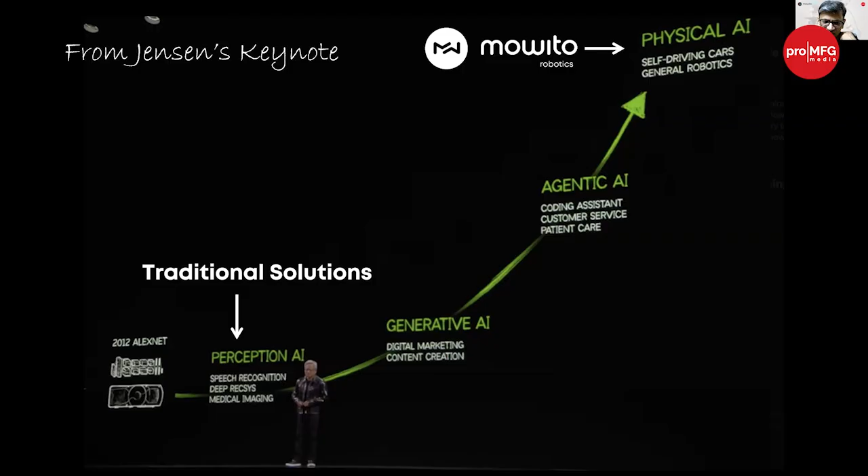If you look at how automation has been in the industry so far, traditional automation typically has a system integrator who starts with a standard set of components like a robotic arm, camera, and gripper, then adds vision AI software, usually from a Cognex or a Keyence. They are the big daddies of the vision world. But lastly, he writes custom software for a particular task, and this is what the integrator will do and deploy the whole system.

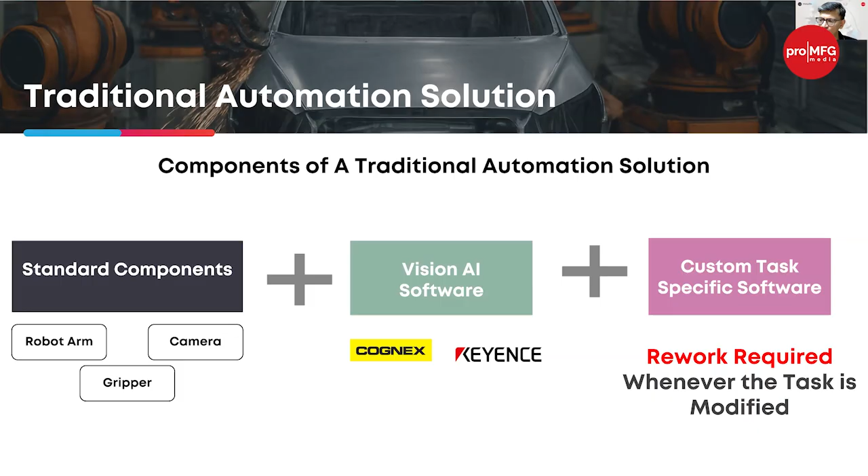Now, the challenge is whenever there is a change in the part design or whenever there's a change in the environment, this custom software has to be redone, it has to be rewritten. Then you call the integrator back, he has to do his modification. Sometimes it involves redoing some jigs and fixtures. All of that takes time and effort and money. And this happens every time you introduce anything new in the line or anything changes in the line.

What are we trying to do? We are trying to walk away from that paradigm completely, remove all the Vision AI software and custom task-specific software, and replace it with one AI model which controls the robotic arm. This AI model is capable of handling most of the standard tasks, including inspection, assembly, and soon wire harnessing as well in the assembly line. These are the tasks we focus on, and we want the AI model to be capable of handling these tasks without the need for jigs, fixtures, and other paraphernalia around it. Let me just show you a quick video.

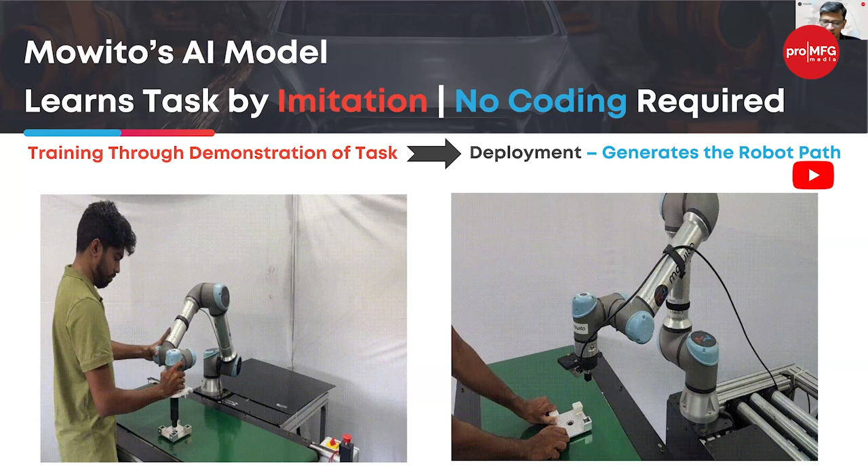If you can see the video playing on the screen, what you're seeing on the left is an operator demonstrating the task to the robot. As he demonstrates the task, we are collecting all the values from the vision, joint sensors, torque sensors, all of it, and we are fine-tuning our model. The AI model is already there, it's being fine-tuned using these demonstrations. Once the demonstrations are done, you can see that even if the part is being moved, the robot is able to accomplish the task successfully. So it's now completely autonomous in nature.

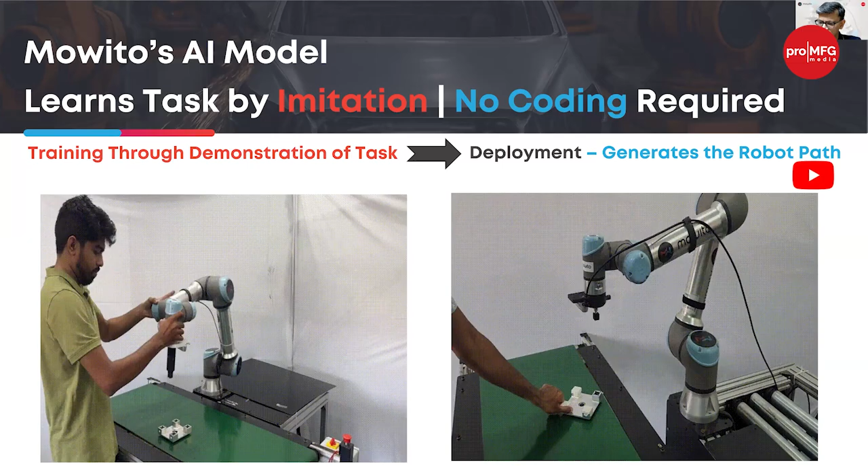Of course, there's a camera on the arm which you may not be able to see. We are using a camera, so all of the data from the camera, from the torque sensors, from everything is being used to fine-tune the model and to help the robot understand what it means to complete the task successfully. After which it becomes totally autonomous.

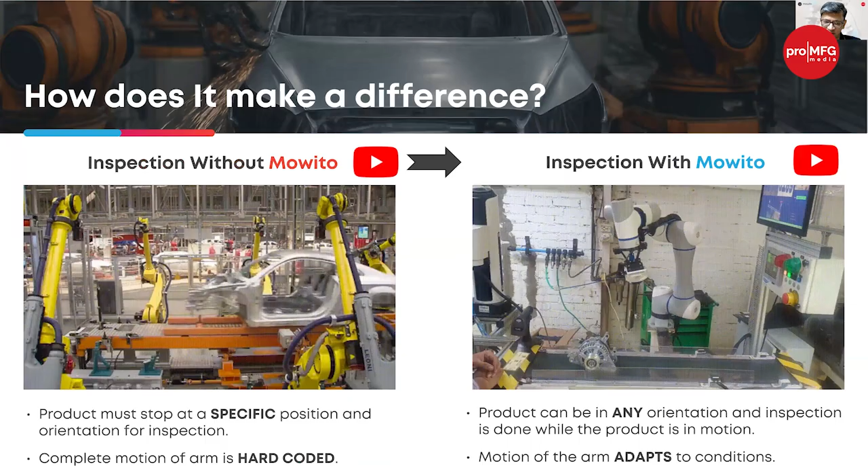Now, how does it play out on the line? Just to give you a live example, on the left you see a traditional inspection line for a car chassis. So the chassis comes, it has to be in that particular location. The robots are hardwired, hard-programmed to go to particular locations and take images. If there is any change in the position of the car, the robots wouldn't be aware of that. They just take the images they always take, and the images may not be useful at all. But the robots still don't know where the car chassis is. They are all working in silos, all independent of each other.

But what you see on the right side is what we have implemented at Denso, one of the largest manufacturers of alternators. They have a line to inspect alternators, and they have 8 or 9 different variants of this alternator, not just one. They wanted a fixtureless line for this inspection, because the moment you add fixtures, you cannot work with different variants on the same line. It becomes a constraint.

So to remove the constraint, they wanted a fixtureless line, and on top of it, upstream, this alternator is being placed by a human operator on the line, which means there can always be a change in position or orientation. They wanted a system that could accommodate all of this, and we have delivered a system with a cobot with 2 cameras on it. It automatically tracks the part, aligns to it, and captures images for inspection without stopping the conveyor. What they were earlier attempting with 6 or 7 different static cameras, we have replaced with one system operating on the fly, delivering the result they needed. No jigs, no fixtures, no stopping the conveyor, improved throughput, all in one go.

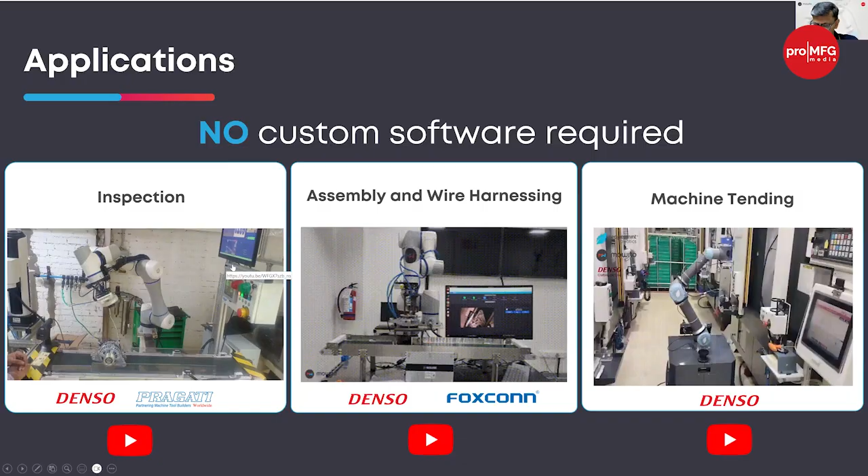What I'll do now is switch over to some videos of these particular use cases, and feel free to stop me if you have any questions in between. Let me just share a few videos. And if any of the panelists has any query, you can please feel free to ask.

I have one query. Okay, in AI vision camera, up to what accuracy can we capture?

So it depends on the use case, and it depends on the camera itself. We don't use Cognex or Keyence cameras. We decide on the camera, either Basler, FLIR, or IDS. Now, which particular lens we use and which camera and resolution is decided based on the size of the defect you want to capture.

This is on ceramic parts for a company called Indo-MIM. It goes into an oxygen sensor for Bosch. Those kind of use cases can be done with vision cameras, no doubt about it.

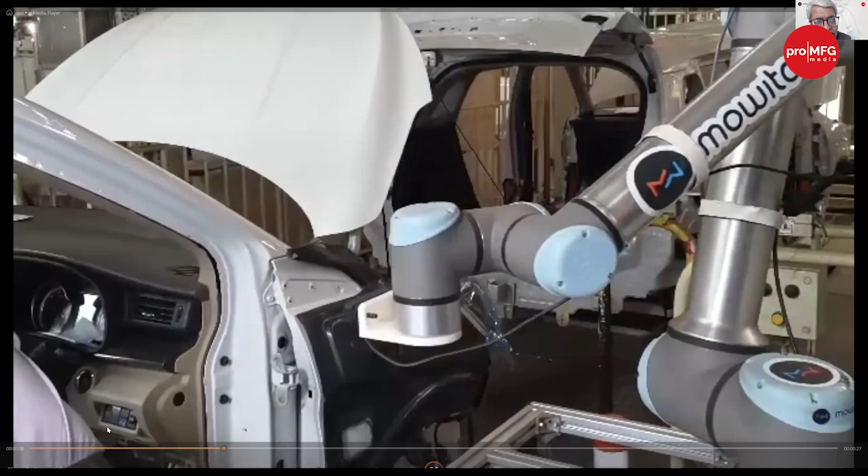So this is for the cobot-based feature inspection for end-of-line inspection for a car chassis at MSI, where they wanted to tally the features with the variant because it's a multi-variant line. So different variants come on the same line. And obviously they cannot stop the line to inspect.

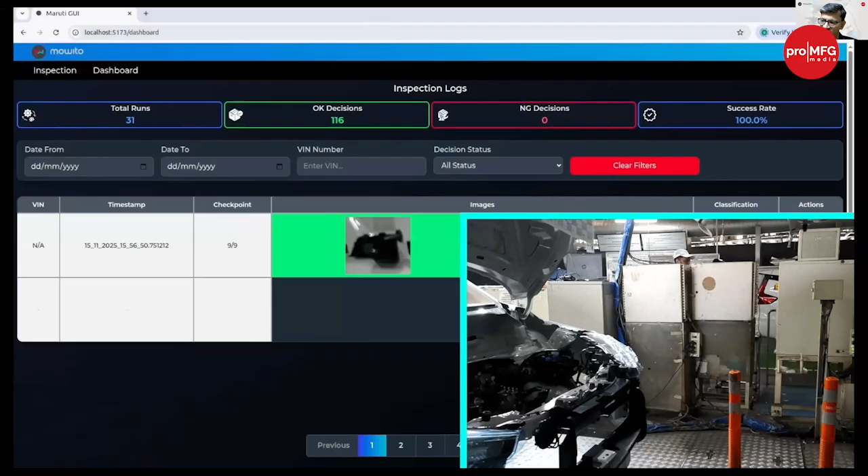Today what's happening is the operator holds a tab in his hand. He has to bend inside the chassis, look at the various features, and fill checkboxes on the tab. But it's very hard to do this for 8 hours a day when you have to bend, look, and move across the line.

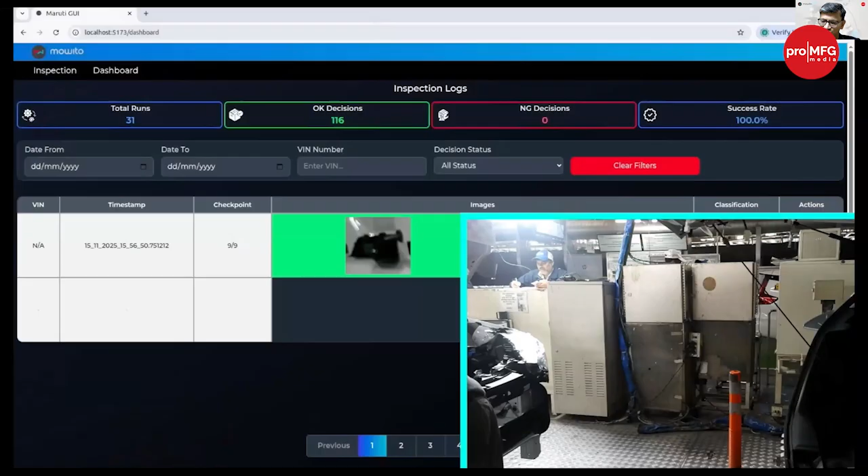So with this solution, the cobot automatically tracks every chassis that comes on the line, aligns to capture different images from different focal points, and then analyzes the images at runtime to say this feature is part of this variant or it's not there as part of this variant, which is wrong, and then flags that. So that's something we have implemented, again without stopping the line.

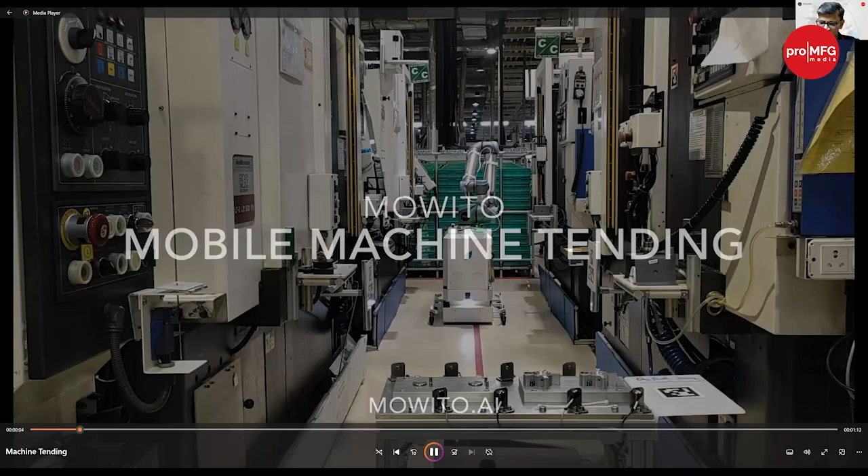This is a use case for machine tending, which we have deployed at Denso. This is AMR based machine tending, handling 4 machines in one line. It has to pick the part, place it into the machine, take the part from one machine, and place it into another. Of course, the cycle time was sufficient enough to do this task.

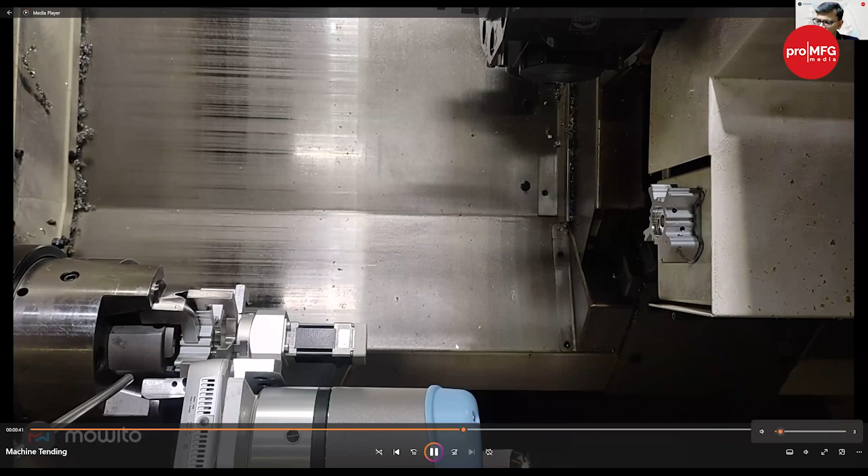But the real challenge here is the AMR vendor, Peppermint, which is again Pune based. The real challenge was we had to accommodate for the inaccuracies of the AMR because the AMR will stop with 10 or 15 millimeter inaccuracy, but I have to place the part with 200 micron accuracy in the chuck. So to enable that, we're using a mix of vision and force feedback.

Let me go back a little. I'll slow down the video so you can get an idea of what I'm talking about. At this point, the camera actually loses focus of the chuck. I cannot see anything that's happening, so I am completely going by force feedback to say whether the part is butting against the chuck or not. We're using the torque sensors available in the cobot, and it actually wriggles the part just like how a human would do it, so that it butts against the base of the chuck.

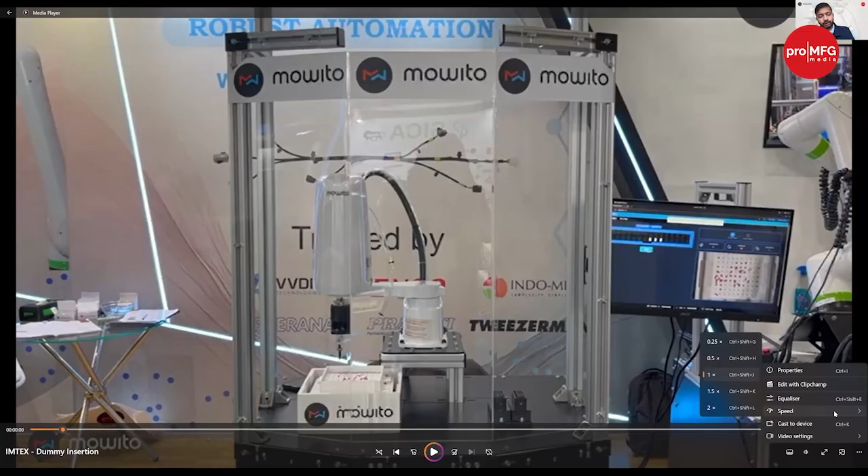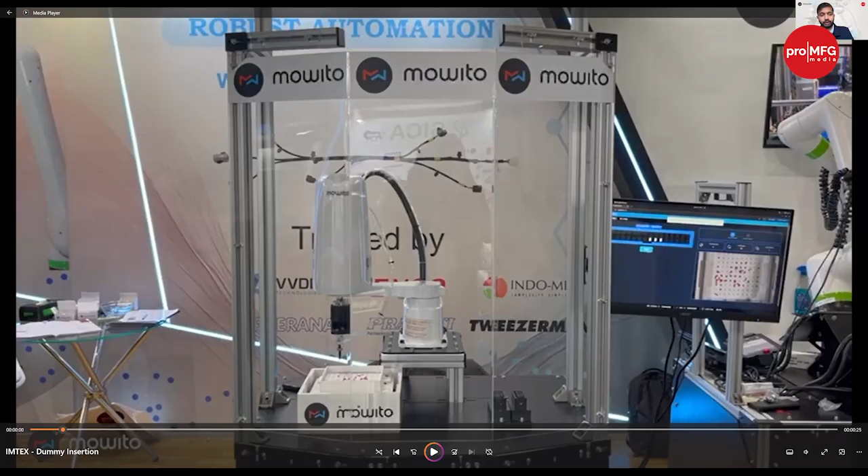Just to add to what Aditya said, in summary, in an ideal world, if everything was very accurate, a vision system would not be required. But as the AMR is a physical system, it will have inaccuracies in where it stops, 5 to 10 centimeters, even in the yaw angle. Further, when the arm extends, there will be a tilt in the position and orientation of the AMR. So when you operate it in the real world, there are a lot of inaccuracies. And as you might be aware, when you fit the object inside the chuck, the clearance is very low in most cases. In this case, it was 200 microns.

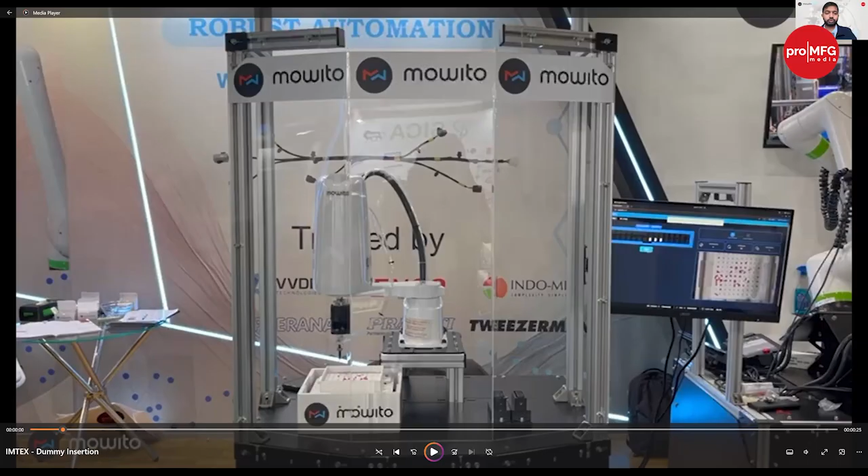And in the case of a CNC machine, there will be coolant coming out, which can affect the vision of the system. Further, in these close quarters, the vision does not get the full view. So we are not only using vision, we are also depending on tactile feedback to make sure that the loading and unloading is a success.

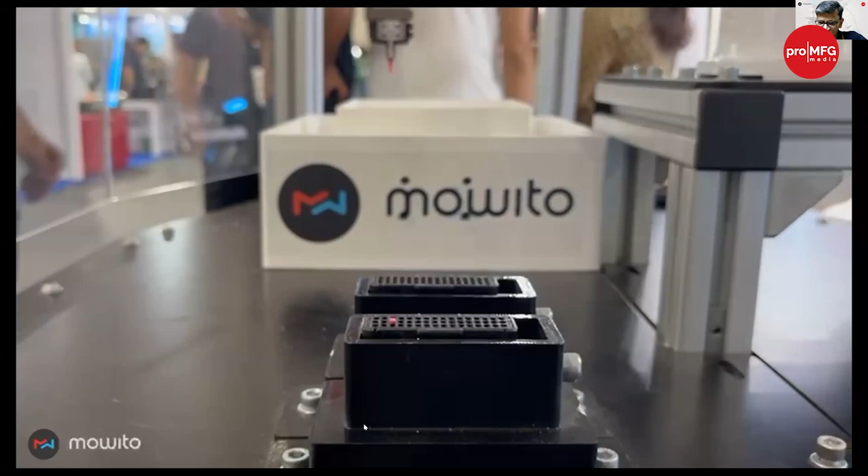So this is a small part assembly system, which I'll demonstrate right now. This is for the wire harness dummy seal insertion that we have done. But of course, it's not restricted to dummy seals alone. It can be used for any small part assembly. What you cannot see here is there's a camera above the feeder that you're seeing, and that's what is actually guiding the arm.

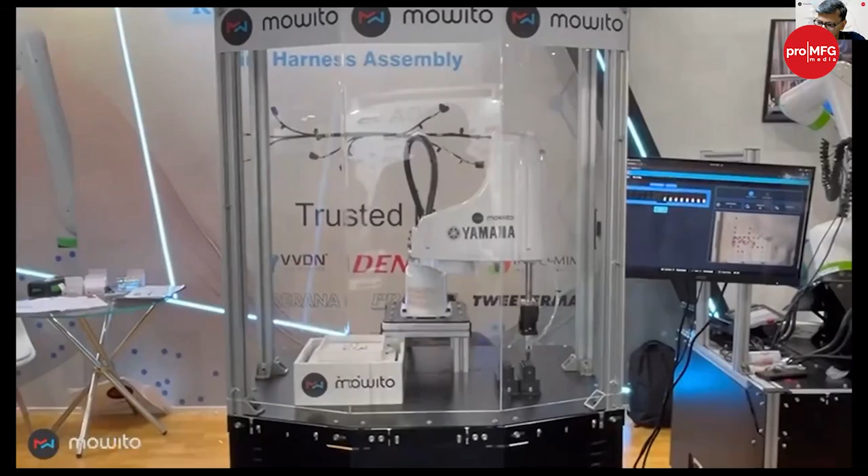So this feeder that you're seeing, the vibratory feeder, right above that there's a camera, and that's what is guiding the arm to pick from the right slot and place it in the seal. So any bunch of small parts can be used. This system can be used to assemble any small parts required in high volume. Right now we are working with another company which wants to do assembly of seals with this system, and of course from the wire harness industry we already have ready orders for this.

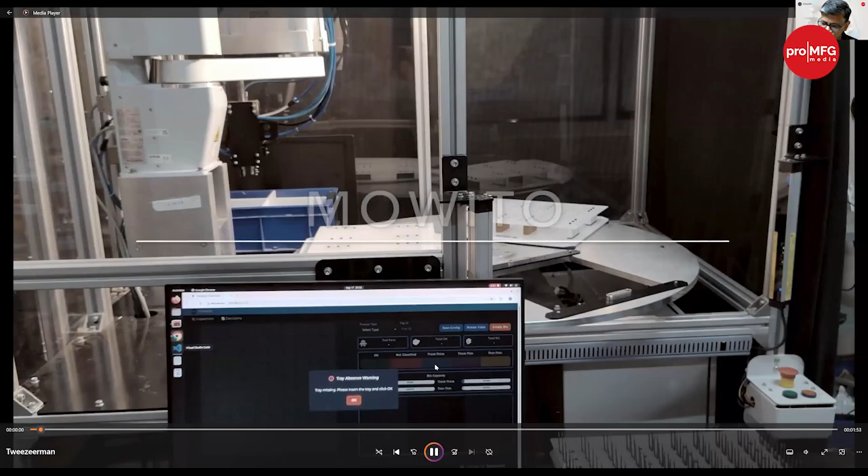And we have delivered a full inspection system to a company called Tweezerman. Tweezerman is a German company which manufactures tweezers for the beauty industry. They're based out of Pondicherry. This whole cell was a full end-to-end development that we did for them to inspect the symmetry of the tweezer lips, because the lips of the tweezer have to be symmetric. And we are looking at a 0.05 symmetry scale here for the two lips.

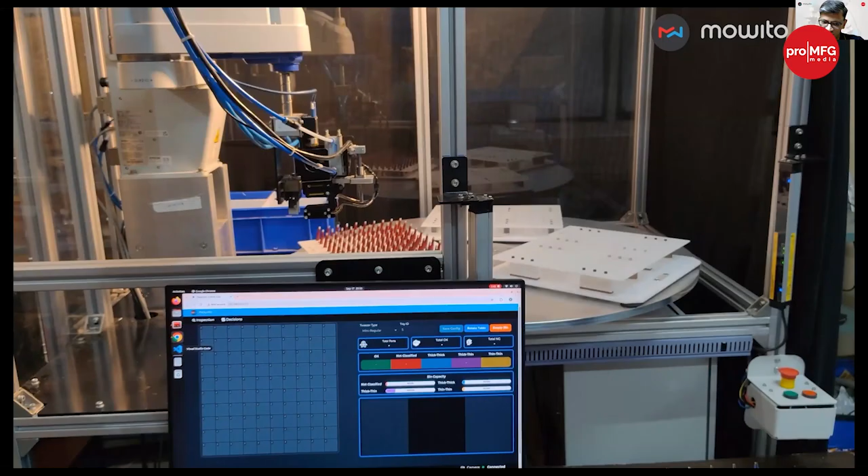So the UI that you see, like this is what I was talking about earlier, the user interface plays a huge role in how quickly the system is adopted. And the entire UI was built by us. So it does three passes: first it has to check the height, then it arrives at the right focus and checks the tweezers.

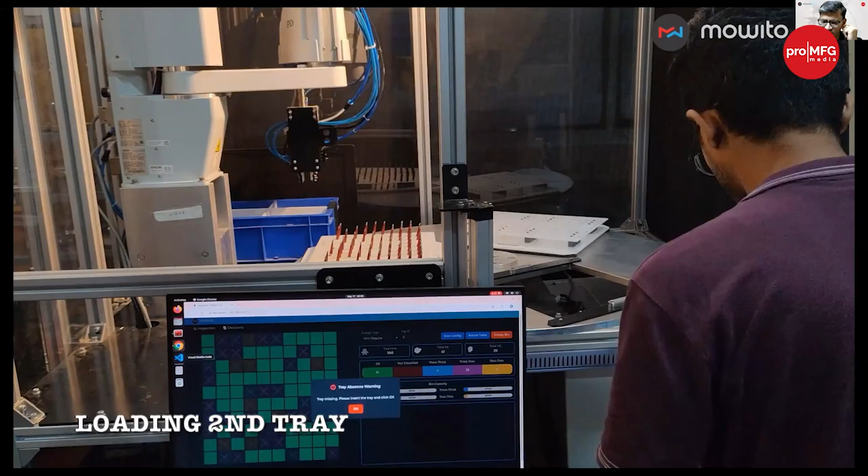At the bottom, you are seeing the two black lines, that's actually the two lips of the tweezer, and we are comparing the two lips. Again, in the UI, the green ones are good, and different colors mean different things, like both sides are thick or both sides are thin or something like that. Then we pick out the bad ones and put them in a separate bin. So this entire system was developed as a turnkey solution for them, and it's now being used in production.

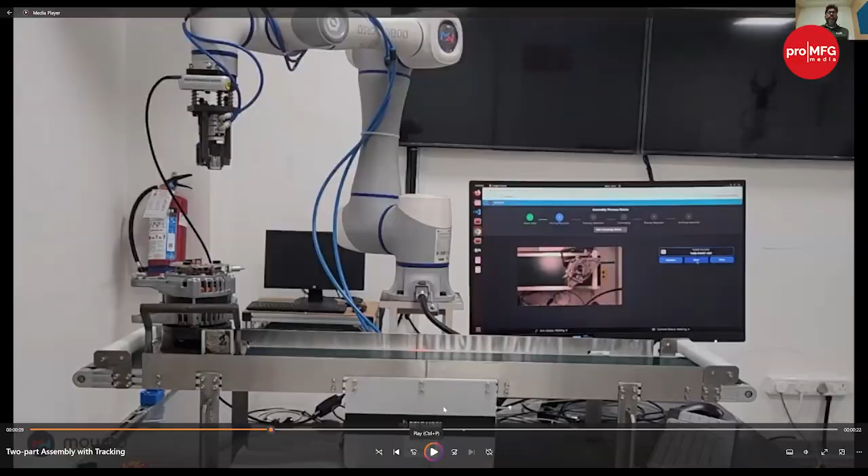Aditya, I think you're based in Pune, right? We are based out of Bangalore, but Pune we are getting a lot of inquiries, so soon we will also start something there. When you're in Pune, can you visit our plant? Sure, why not, I'll definitely visit, just for that.

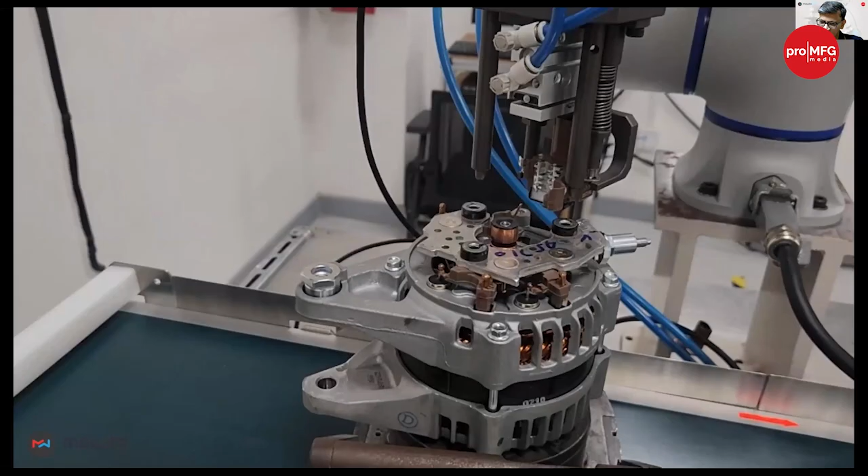I just wanted to show another video about the assembly itself, what we call two-part assembly. You saw the inspection of the alternator earlier; we are extending that whole concept of vision-guided robots to assembly. Here, as the alternator moves on the line, we are actually assembling a part on it. No feedback is coming from the conveyor, it's completely done at the vision layer, tracking the alternator, aligning the pins, and placing the part. I'll just replay the video.

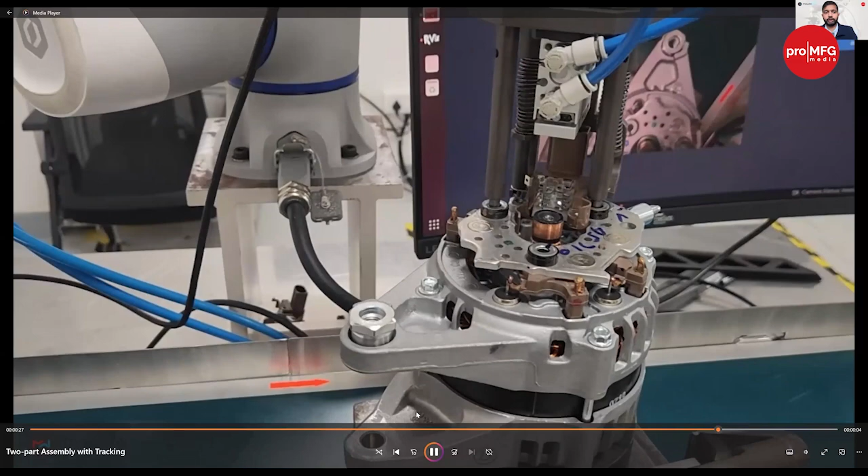The reason we are not taking feedback from the conveyor is that the integration time reduces. For example, if the line is continuously running and you do not want to stop it, you just need to put the robot arm next to the conveyor on a pedestal and it will be ready to work. This is how we did POCs at Maruti as well, because the main assembly line would not stop for us. We just put the robot arm on a pedestal next to it, and it was ready to go. The implementation is without any disruption to the operations.

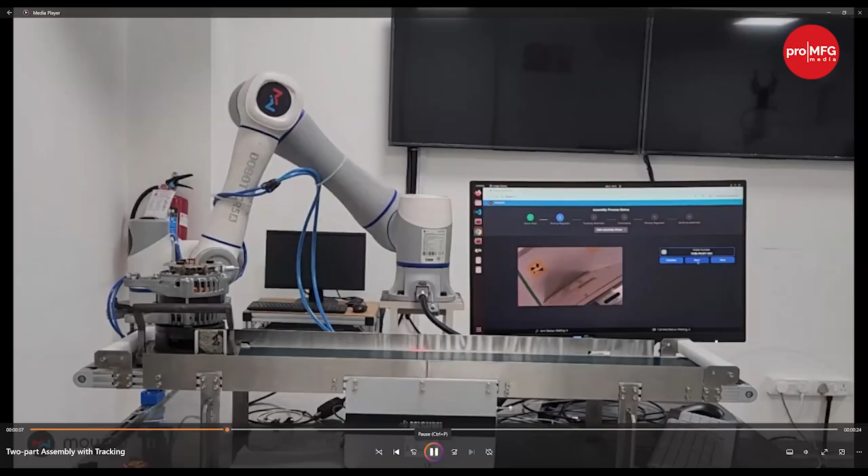It can handle a variety of takt times. The question is, can it handle a variety of cycle times? It depends on what operation the robot arm is doing. Our vision system does not take a lot of time, but for the robot arm to move from one place to another, some actual motion time happens. For example, let's say the system is designed to produce 500 parts in a shift, but my requirement today is not 500 but 200, so the line will run at lower speed. Will I have to reconfigure it, or will it adjust itself automatically to the new takt time? It will automatically adjust.

The speed we have tested so far is around 90 mm per second of the conveyor. We are not using conveyor speed as an input; anything below that speed it will automatically adjust because we are tracking the part itself, not taking conveyor speed as input. Even though conveyor speed is not an input to the system, the speed of the part is still governed by the conveyor. Up to 90 mm per second of conveyor speed, we have been able to place the part like this. So even if you stop the conveyor or reverse it, the system will automatically adjust to that.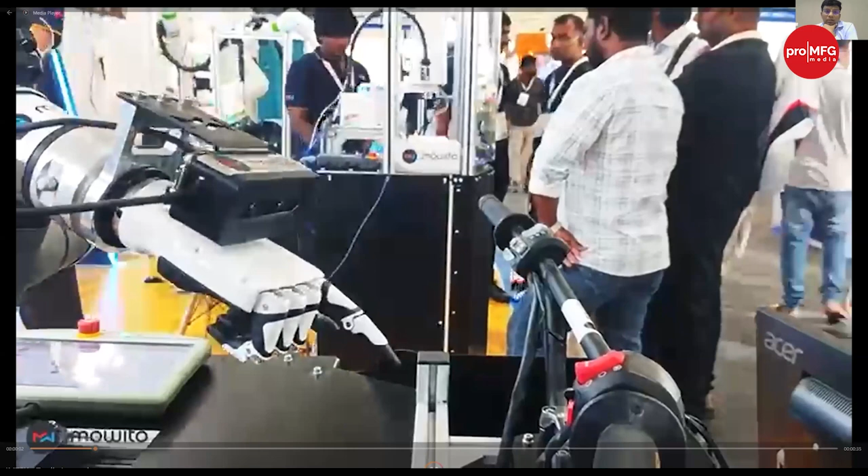Anand, any question or observation from your side? No, it is great, maybe I will contact Aditya to know further. Yeah, so this was another demonstration.

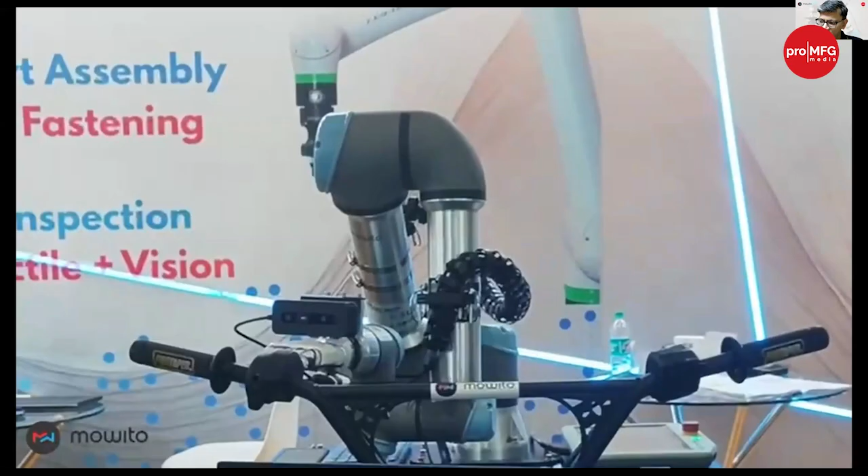We had a stall at Imtex this year in January, and this was another demonstration we had there for tactile inspection. If you look at any vehicle, we are showing it on a bike's instrument cluster, but it can apply to a car or any place where inspection can happen visually, even with cameras. But there are some cases where a human is still involved, wherever it involves a touch and feel kind of operation.

Here it's like a human would be checking every button of a vehicle on the assembly line. How would you automate it? You would use something like this, right? You would have to use a system like this.

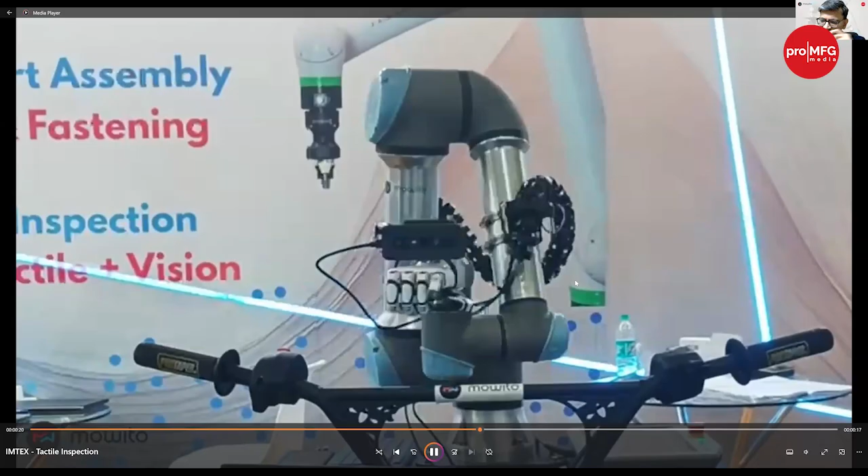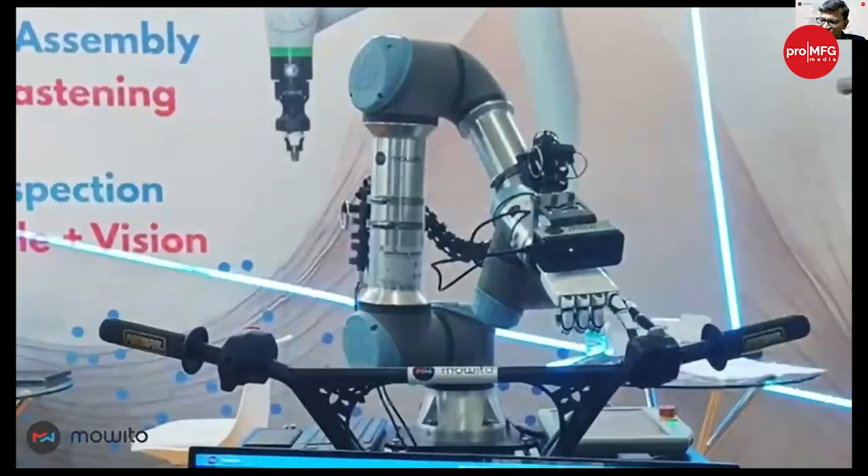That's what we are demonstrating here, where we have mapped the force signature of a button that works normally, and the moment it does not match that signature, we know it is faulty. So for every button, there's a force signature, be it a horn, a light switch, or an indicator. There is always a normal force signature.

If you see the bottom of the screen on the right side, it is showing you the particular force signature for this button. Now, if the same button is faulty in another vehicle, we know that it does not give the same force signature. That can be seen.

In some cases, the gripper can also be a simple gripper, and we can use the cobot's force sensors to achieve the same result. It depends on what axis we have to measure the force in.

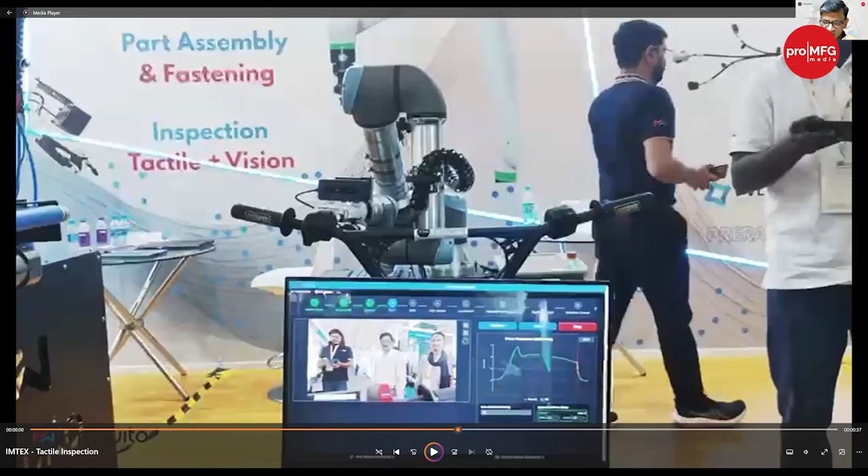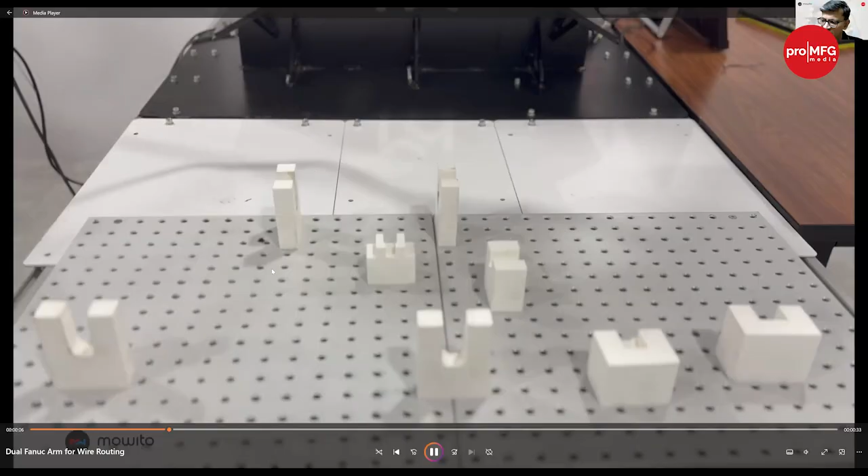We have also now started working on dual arm use cases. I'll show you a quick use case in wire harnessing that we are working on for specific customers. This is two Fanuc cobots which are able to handle a harness. Of course, wire harness has barely any automation available today. It's completely manual because current robots cannot handle flexible objects the way they are programmed.

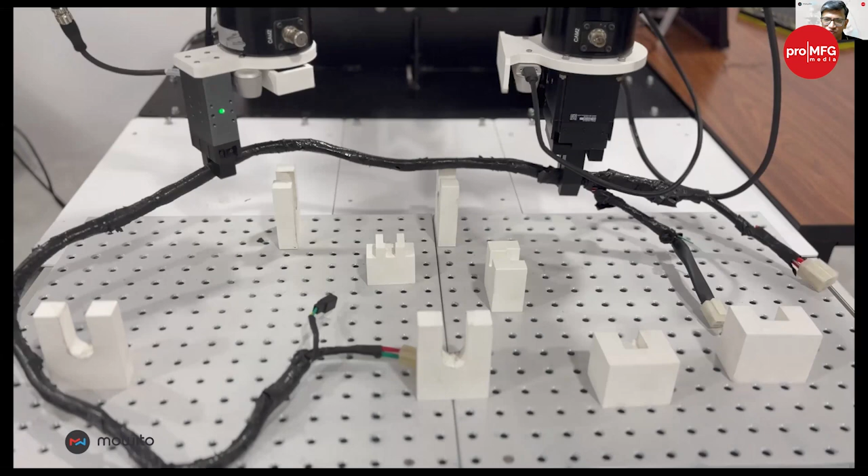This kind of application, requiring multiple cameras and multiple force sensors, has not been done before, and we demonstrated this at Imtex. It picks up a harness and lays it out the way it's usually done in the harness industry. This is step one, after which we will do the inspection, taping, cable tying, and all of that. But we have successfully figured out how to handle flexible objects like this, paving the way for the next set of operations.

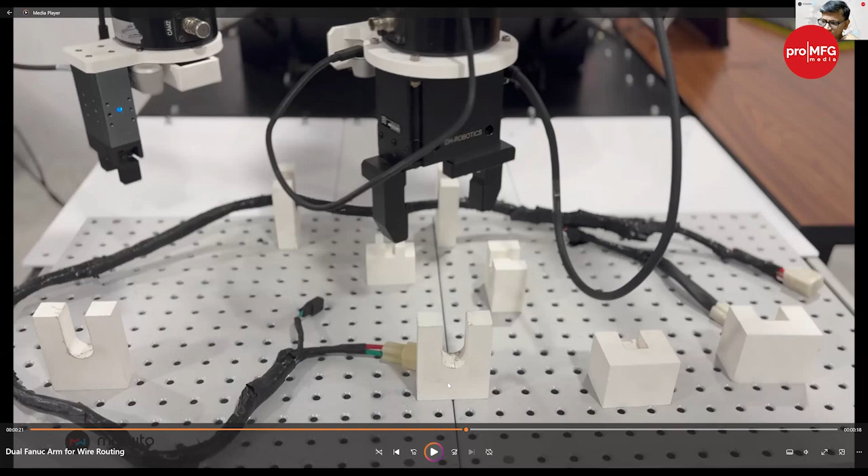In this specific application, one of the key interests of our customer is the inspection—laying down the route wire and doing the inspection. But as Aditya mentioned, this is step one. There will be more automation coming soon on this line, on this process.

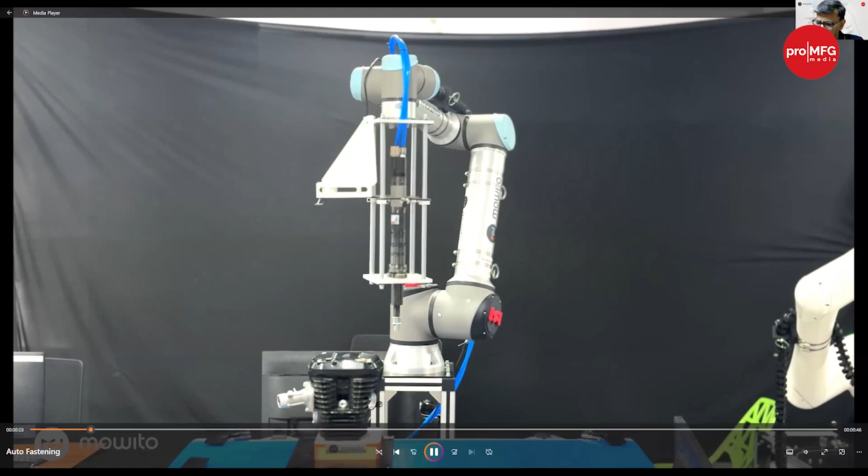One last thing I'd want to show is fastening. We are working on dynamic adaptive fastening applications. It's similar to assembly, where the robot automatically tracks a part coming on the line and uses a standard tool, like an Atlas Copco or Ingersoll tool, aligns to the fastener and tightens it, again without having to stop the conveyor.

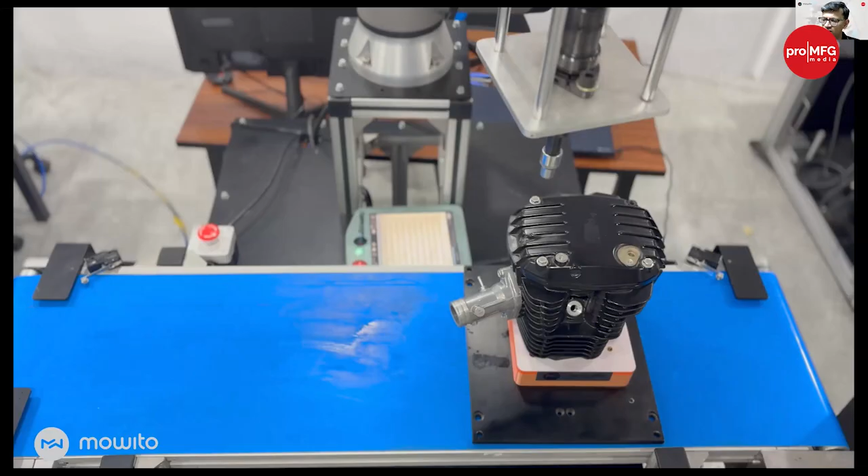Of course, the torque setting is whatever you set on the tool itself—nothing is changing there. What we are essentially adding is the ability to align to the part at runtime. You can see that it even aligns with the change in yaw. It's not just the horizontal axis; we're also accounting for the change in the rotation of the part.

That's about it from our side. I think I've covered that.

Very interesting use cases and videos. I think I had seen it a few weeks back, but this time you incorporated more through your recent experiences. It was useful to see that.